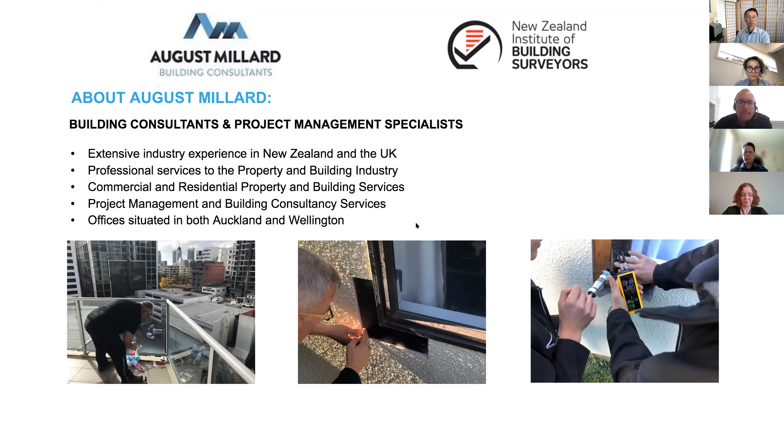And there's just a few clips here of some of the things that we get involved in. I think some of the audience will know what building surveyors do, and some of the audience probably are not sure what building surveyors do. I'll switch on to the next slide. Sorry, going back, in terms of sort of our background, and building surveying roles.

So one of my other roles in the industry is I'm currently the Vice President for the New Zealand Institute of Building Surveyors. So I thought I would touch briefly on some of the roles that building surveyors play. A lot of people in New Zealand would see building surveyors more dealing with weather tightness issues and leaky building investigations. However, if you look at the UK, building surveyors cover a much wider breadth of services, commercial building surveying, pretty much quite different to what we do in New Zealand.

In terms of the New Zealand Institute of Building Surveyors, we're a membership of roughly 230 members throughout the whole of New Zealand. Sorry, for some reason my screen's changed. We as an institute also offer training, and that training helps to develop our junior building surveyors and some of our members that come in from other areas of the industry like builders, etc., who want to retrain. So we have our 14 module system that allows you to then go through to become a registered building surveyor and obtain a diploma in building surveying.

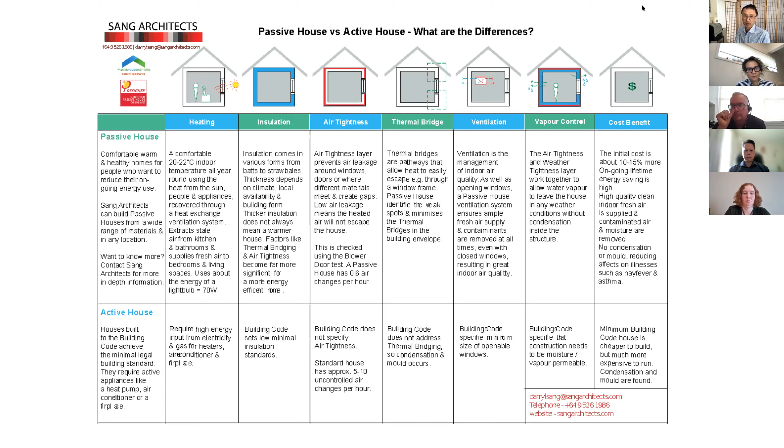It has continuous mechanical ventilation with heat recovery. So it brings in fresh air, gets rid of the stale air, but also hangs on to all the heat of the indoor environment. It gets rid of all that extra moisture, and avoids all that condensation and mold, and gets rid of all the CO2 and toxins inside. And it also controls vapor through the building envelope. It's airtight, but it's not vapor tight. It allows the wall structure to breathe.

Let's have a look. That slide seems to be changing itself.

But there we go. So anyway, that was the bit about the difference between passive house and an active house. An active house doesn't do those things. It tends to be cool and drafty, and it leaks a lot of heat and a lot of air, and you still can get condensation and mold on the inside.

So let's talk about the Wunderbar passive house. It's on a site in Orewa in the north of Auckland, in a new subdivision, 471 square meters, so a reasonable size but compact site. It has a slope on it from the high point at the rear down to the street. It faces north, and it's in a very high wind zone.

Residential single house zone, so only one residential unit on the site, and it's also subject to some planning regulations, particularly related to the Orewa area, and it's in the H5 residential mixed housing zone under the Orewa precinct. And it's also a new subdivision, so it's subject to the Sunny Heights subdivision design review panel. So there's a few planning restrictions around that.

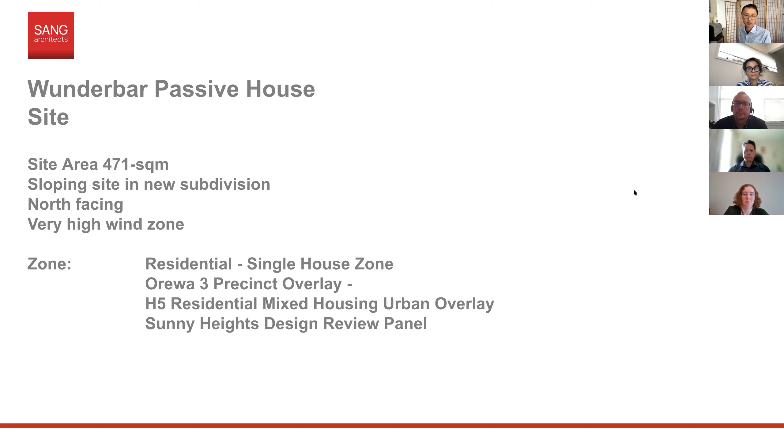So, as I said before, it's a new build house. Basically, it's a concrete house design, 255 square meters in floor area, plus 45 square meters of garage, 2-story, 4 bedrooms with 3 bathrooms. The main structure is Izodom. It is the Izodom insulated concrete formwork walls, 250 mil thick. That's 50 mil skins of polystyrene with 150 mil solid concrete reinforced core.

The Izodom system's actually passive house certified, so we know it's been analysed and certified to be up to the passive house standard. And that's the whole system. We're using the concrete ICF formwork walls. We have the Izodom insulated foundation system, that's the passive house certified floor slab, and we're also using the Izodom mid-floor slab system. So as a package, that is a fully passive house certified system. So we know it's going to perform, and we know that the thermal bridges have been thought about and reduced or eliminated.

The garage slab itself is outside the thermal envelope. There's a garage on the lower level that is outside the thermal envelope, but it's thermally separated from the main house. And we're rendering the whole of the outside of the house with a Sto plaster system. And the high performance windows are Gealan Festner S9000 UPVC triple glazed windows, again passive house certified. And we also have an external aluminium shutter system to provide extra shading for some of the windows that are going to be subject to quite a lot of sun. And the roof is just long run colour steel. And we're due to start on site very shortly.

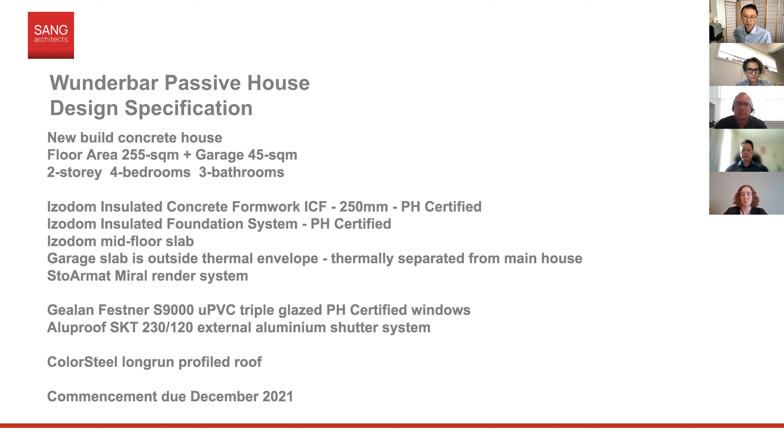So just a few images of the house on the site. So this is from the street, standing on the north boundary of the site and looking back up the site. So you can see we have a sloping site, so we're partially retained into the site. The garage on the ground floor, and there's a bedroom suite on the right of the ground floor, and then upstairs facing north are the living areas, living, dining and kitchen areas.

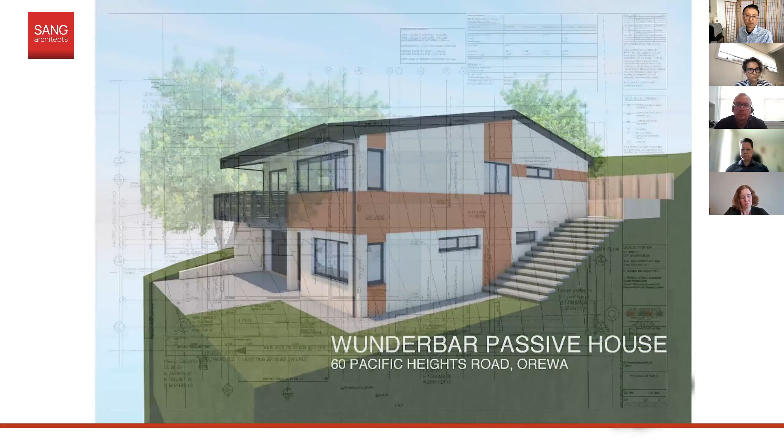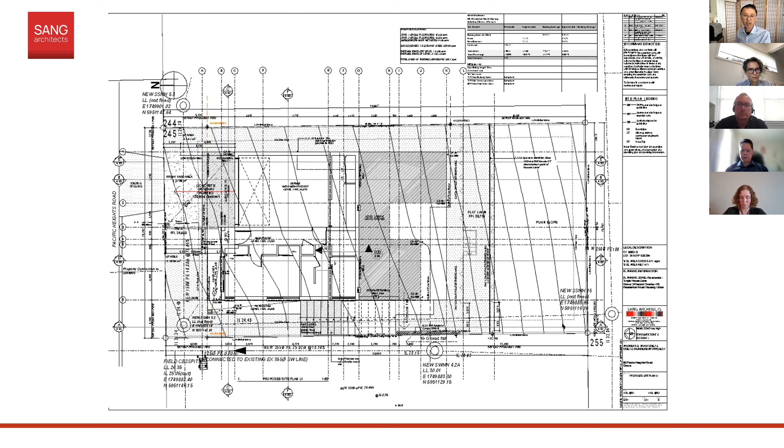And that's a site plan there. This is the street on this side here, and on the left-hand side of the plan, this is the garage and that bedroom downstairs, partly retained into the ground. This is the high back of the site, and there's some retaining at the back. And then upstairs we have all those main living areas and that deck looking out over the street, and then 3 bedrooms at the back.

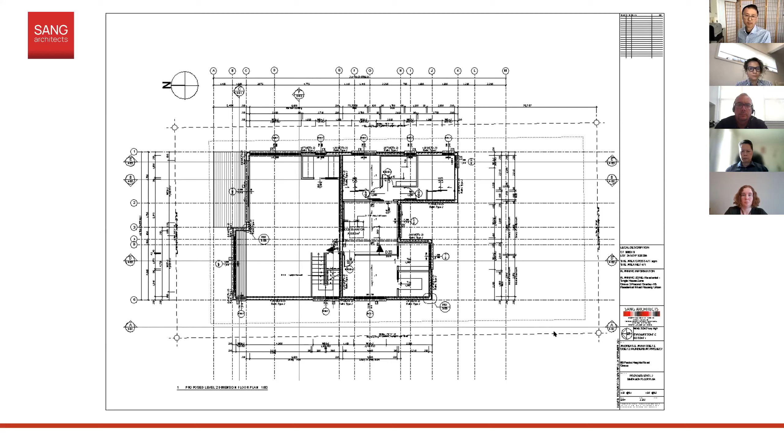Again, that just shows the ground floor in more detail with the garage and that bedroom downstairs, and then here the living areas and the 3 bedrooms at the back, and just the second living area here. So today we're focusing on the high performance windows. So we have some window details here, and Alia is going to step in and just discuss these.

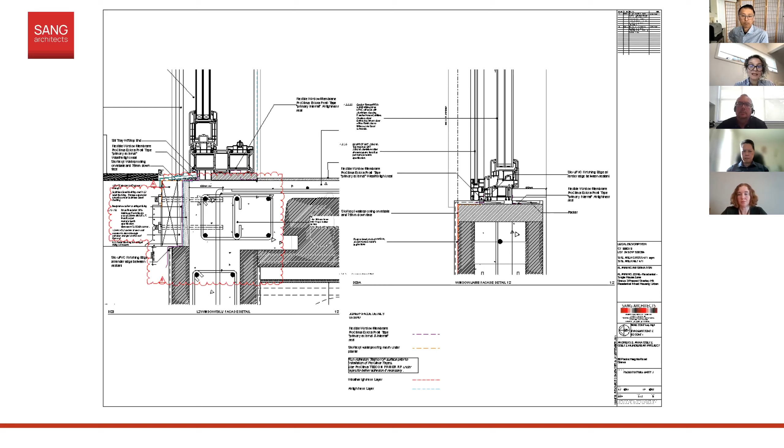So the Tescon profile tape was recommended for use in the project, both as an external weather tightness and internal air tightness flexible window membrane, and also as an air seal. And this has helped in eliminating the use of expanded foam and sealants as joinery air seal solution for this project. So now I'm going to hand over to Ian Fong to discuss the wind load compliance framework and also E2 weather tightness compliance path for the project in further details. Thanks, Ian.

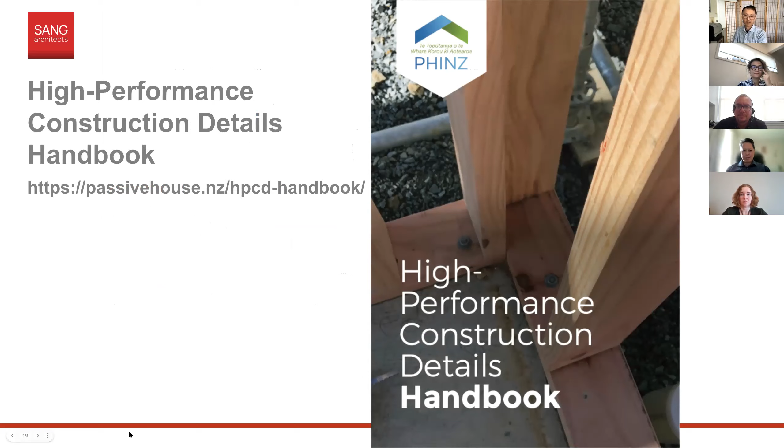All right, so I'll just carry on with this case study. Sang Architects have already talked about the site where the building is located, the profile of the building, how it's constructed, so I won't cover that. I'll focus more on the RFIs that we were asked to deal with. And then what I'll focus on mainly is the process of resolution, which compliance pathway is suitable, the alternative solution, what sort of evidence we had to provide. And then we'll talk about the acceptance of the joinery units in terms of compliance, and finally a peer review of the weather tightness details.

Now, I should also acknowledge and thank Andreas Goetz, the house owner. He's been supportive of passive houses, and we did ask whether we could talk about his house, and he was more than happy to allow us to share our experiences with it.

I also have a personal interest in passive houses. Daryl August, my boss, knows clearly that during summer I'm the one wearing a puffer jacket, so I like buildings to be warm as well. The warmer, the better for me.

Of note is that when I first got into looking at thermal performance, windows in particular, joinery accounts for about 8 to 10% of the thermal envelope. However, the heat losses from windows are up to 40%. So it's important that windows are done right for passive houses.

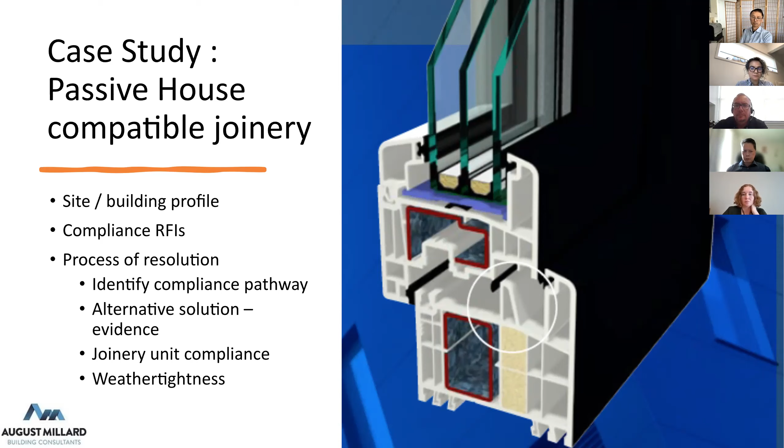So also from a building surveying point of view, we are interested in getting houses done right because we know that inside the building there's a lot of moisture as well, a lot of condensation, whether people are drying clothes or other activities within the house. And with a relative humidity above 70%, you're usually going to get mold. So it's not just about cold, but also the dampness within houses. So with that in mind, that's some of the things we looked at in terms of performance.

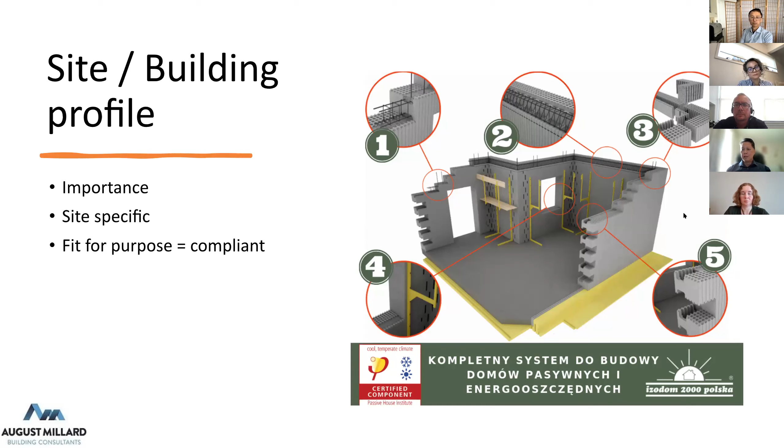But coming now to the RFIs, Gerald Sang also mentioned clearly in his slides that this particular building is in a very high wind zone, and that is particularly important in working out the compliance performance standards that it needs to meet. So if someone asks us, can you give us approval for window compliance or give us a review of it, the first thing we'll ask is, where are the windows installed? What type of building, and where is the building located? That's the first thing we try to work out, because we have to provide something that is fit for purpose, and I believe council officers are of the same mentality.

All right, so these are the RFIs that were briefly touched on by Alia and Gerald Sang. There were three elements. The joinery element itself: council were not familiar with this product. They needed to know, okay, you've got shutters that are going to provide some shade, and those shutters are attached to the joinery. The joinery we're not familiar with. It's an imported product as well. So you need to tell us that the joinery is suitable for use in New Zealand, and in particular in this location.

And then the RFIs related to them being unfamiliar with it also included questions like, okay, water gets in, how does the water get out? What are the drainage features? Where's the evidence to show that this product will allow water to drain out? And the last one is obviously to do with weather tightness, because they're not familiar with the product. They don't know how it fits into this particular building, which is insulated concrete formwork. So it's about going through, which I'll do now, firstly understanding where council are coming from, understanding what the issues were, and then we could work on it.

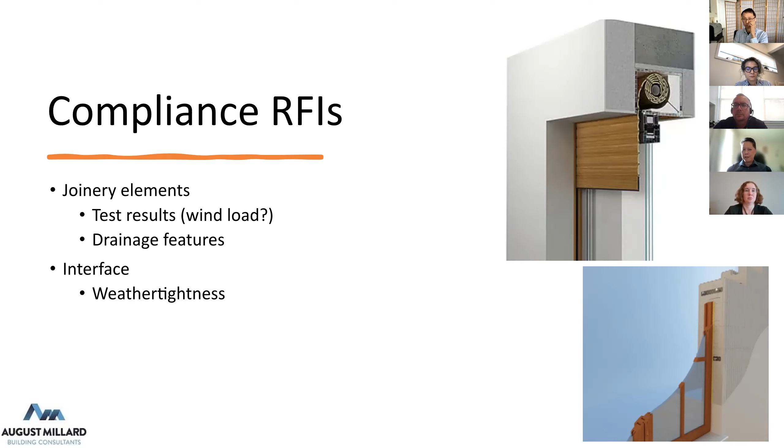All right. So with window joinery, in terms of New Zealand Building Code compliance, there's B1 structure, B2 durability, and E2 external moisture. We focused on E2 because we knew that's where council's concerns were, and partly B1 as well. So under E2, external moisture, in the New Zealand Building Code, there's a whole bunch of different compliance pathways.

The way we approach things is we want things to be simple and things to be done rather quickly for the client. So understanding the compliance pathways is, if it's a deemed to comply solution, which is the acceptable solutions, which is AS1, 2, 3, 4, or verification methods, we try and go with the ones that require us to do the least work, and that obviously is acceptable solutions. Preferably we avoid verification methods because that involves a lot of testing, and then that's another whole range of costs and technical data which we don't like to deal with. It can be quite expensive.

So in terms of what's best for the client, we have to go with what is already deemed to comply, what's already available, what council also find familiar and is also able to work with. So I looked into these things and had to filter and eliminate which of these acceptable solutions apply and which do not. Acceptable solution 1, that's for timber frame buildings, it doesn't apply here, so that's ruled out. Number 2 is for earth buildings, so same thing, that's taken out. And acceptable solution 4 is for light steel frame buildings, so it left us with acceptable solution 3.

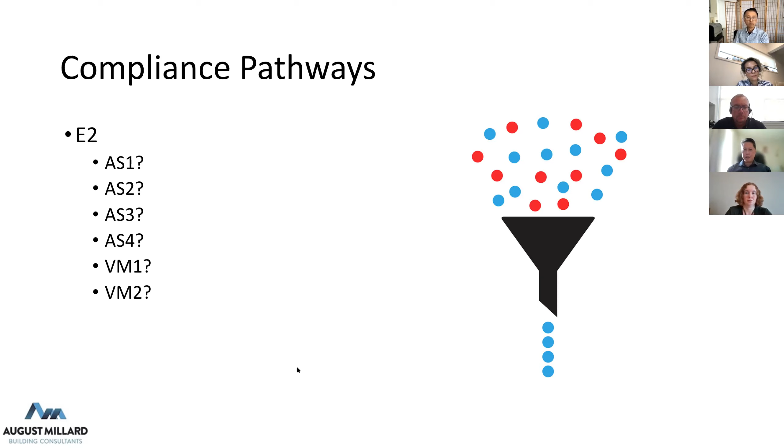So within that, I think Alia mentioned that there's a code of practice that's referenced in this acceptable solution. So we found a detail where the window joinery needs to match and fit, and that's the path we took to demonstrate to council, hey, we've got a scenario which is very similar to this, and with just a few changes, it's very similar to this deemed to comply solution. So ultimately it is an alternative solution, but it is based on acceptable solution 3, which council is familiar with. It's from the New Zealand Building Code.

The diagram I've put up there on the right is just an indication of the extent of tests that this particular window went through in preparing their test certificates. So when we received the documents from the clients, it was in German, but based on a little bit of interpretation in Google Translate, there was a whole bunch of tests, and this is what I've summarized there. It's water tightness, air permeability, wind resistance, mechanical strength, thermal insulation, sound, burglar resistance, and all these other ones. So that's a 30 to 40 page report.

Instead of putting all my time and effort into that, I had to work out what the New Zealand Building Code requires, what AS3 requires. Going back to that, it was basically the things that the New Zealand specific performance standard NZS 4211 requires. It's about wind load deflection, air infiltration, water penetration, and wind load ultimate strength. So those are the four things I had to look for in those test results.

But taking a step back, I'm not sure if anyone has dealt with it before, but sometimes test certificates and test results are provided by the manufacturer themselves. So there's no independence, no impartiality. So one of the things I had to establish firstly was, is the certificate that I'm looking at impartial? Is that reliable? Something I can rely on to know that it's not something the manufacturer has paid for and produced as part of the marketing information. So identifying that it is definitely independent, that the institution itself is also accredited, those were the first steps in establishing trust in the test results.

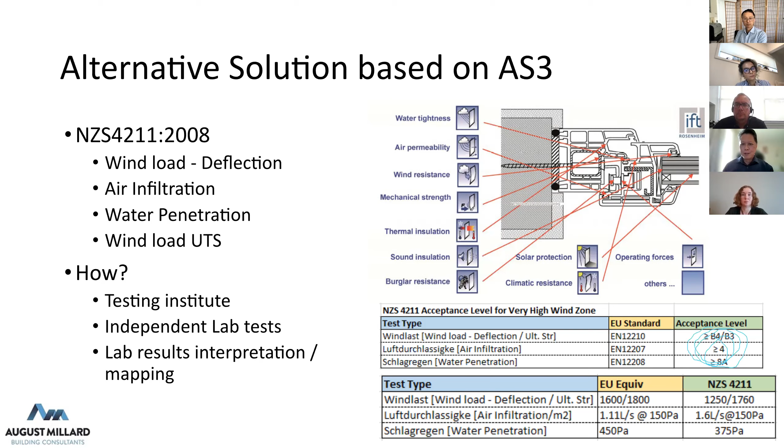All right, so I guess that is the one that I spent the most time on. The easy part is what I'll describe next. All right, so you had previously seen this slide before. One of the issues the council had is they said, look, okay, you've got a joinery unit here, but I don't know what happens when the water gets into it. What happens to the water? Does it get trapped? Does it drain out? We don't know this. We don't have evidence of this.

Can you please show to us or provide the evidence that there are drainage holes or slots for water to drain out? So I guess council found it difficult because the information they were given, they had a lot of marketing information and some brief installation manuals, but it didn't give them the information to meet the reasonable standard that they're after. So I had to dig back and use a bit of German and find out from the manufacturers,

when they actually fabricate these windows, what's the instructions they're given, and it needs to show where the water drains out. So I had to get the diagrams. I believe the best way to show council was with the visual representation. So I got these diagrams from the installation manuals or from the technical fabrication manuals. Then I said, look, this is the translation of it. This is basically showing how the water drains out, and council asked no further questions on that.

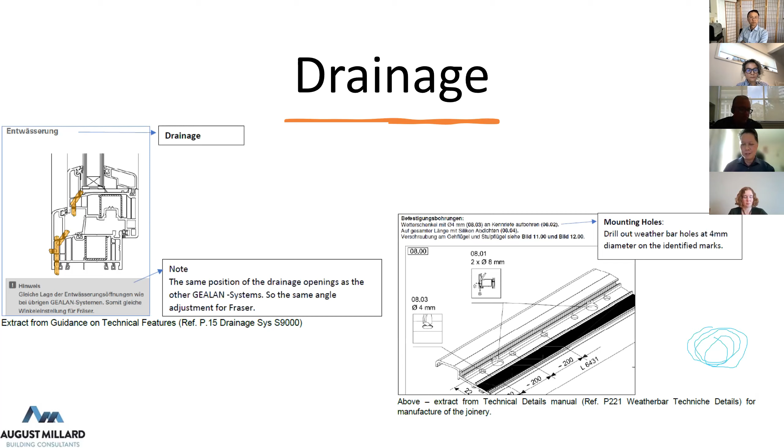So something visual, something very clear, showing the cross-section, showing where the holes are drilled. That's very clear about how the water is going to get out of the units installed. So that was quite easy to resolve. All right, the next one, I'll make some reference to some of the drawings that Sang Architects had provided, because council will get those drawings and not what I'm showing you on the screen now.

So when council receives the plans for consent, they show the units as they are assembled, as they are connected together. So when you looked at those diagrams, I guess council was looking at it the same way that I was. And I said, okay, why is council finding it hard? And the reason is they don't know where the roller shutter ends, and where's the interface to where the head of the joinery unit is.

And then when they interlock together, that alone will prevent water getting in. It's designed to be a weather-tight seal, and it's meant to be very easy to install. So it eliminates a lot of the work for builders in terms of having to prepare a substrate and then getting it installed and using all kinds of sealants. So that was a way to show council, look, it's inbuilt into the design, the fabrication of the product. So that addresses partly that as well.

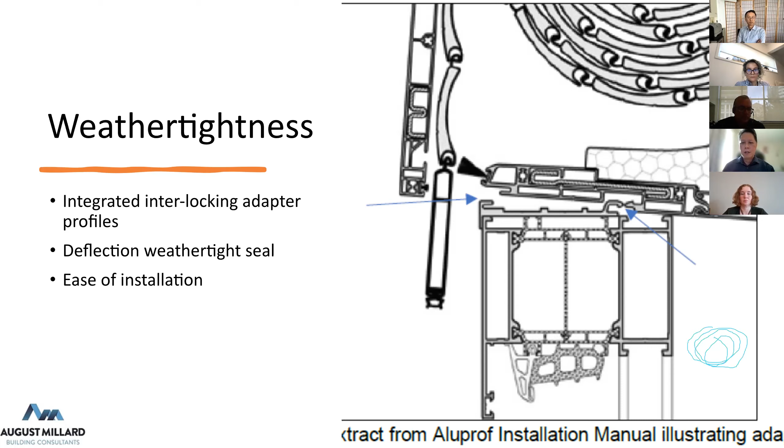And now finally, I'll just talk about a final review of the weather-tight details. I recall that we had talked about acceptable solution 3, and in the code of practice, it specified some of the key elements that needed to be met. So in that regard, when Alia had done her work with Sto and with ProClima, we went back to look at it just to make sure that it lines up with acceptable solution 3, the similar elements that are in place. So it was basically just a quick review from that point on.

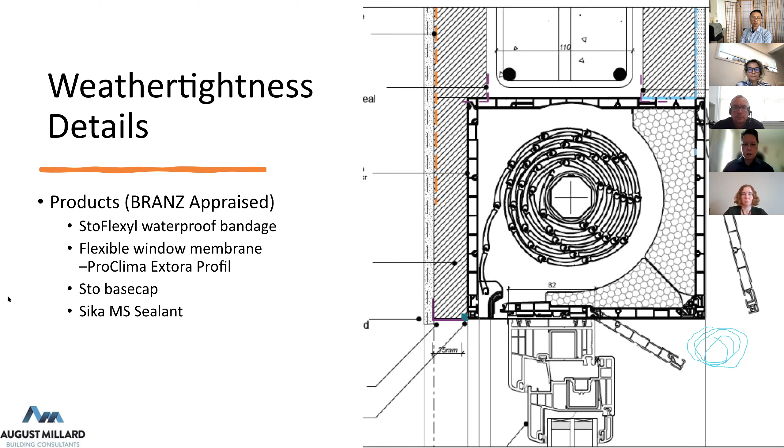And I think Alia's already talked about this, the waterproof bandage, the profile tape, the base cap and the sealants, which is what we were looking for, which matches what AS3 was looking at as well. And just very quickly, that's the head and this is the sill. Nothing too different about this. The only thing we had previously specified in a previous project was the sill tray with the stop ends, so that was also in place in the details, and the rest of it Alia had also clarified as well.

And just a few points on this. These products are BRANZ appraised, so it makes it easy for council to accept, because they know BRANZ is an authority that certifies and confirms that it's suitable. The other thing was that because it's an alternative solution, we had to support that with, I think Daryl had talked about it earlier, the Wellington project, that the details used here are similar to that.

But not only that, I contacted the council in Wellington and asked them to provide something in writing. Look, that's been installed and it's been in service. Is it performing? And they provided something in writing, basically saying, look, this is a fantastic product. It exceeds the expectations. It's definitely performing, because that's the building they go back to every now and then as education for other designers and other consenting authorities. They use that as an example to show others that there can be better windows, better joinery systems in place. So on that basis, we are confident to say that what was specified is performing. So that was further evidence to the technical details provided already.

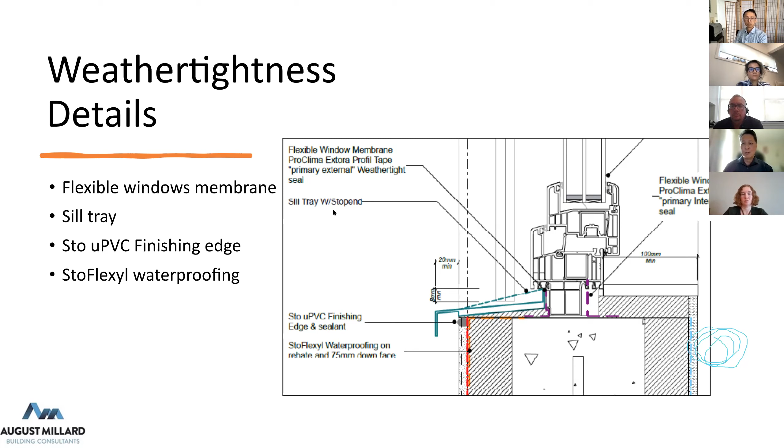And as Alia said, further to that, ProClima also released recent test results as well. So there's full confidence that what is provided is a tested system and it works. So that's how we were able to convince council, look, we've looked at these products in the past, we've looked at the present, we supported it with evidence as far as we can find, and this is the approach we've taken. So there's no reason why these windows cannot be installed in this particular building. So that's the approach we took to resolve the issues, and that's the end of my presentation.

So just a quick run through again: understanding what the RFIs are, where council is coming from, looking at it from their point of view, what are they struggling with, and therefore how can it be made easier for them to understand and process, and therefore put the sign off on, and choosing a pathway that helps them realize, look, this is not too far off from something that already exists, and then giving them all that evidence to say, they've given us the evidence we need, we can now sign off on it. So basically that's the process we took, and hopefully it's of assistance.

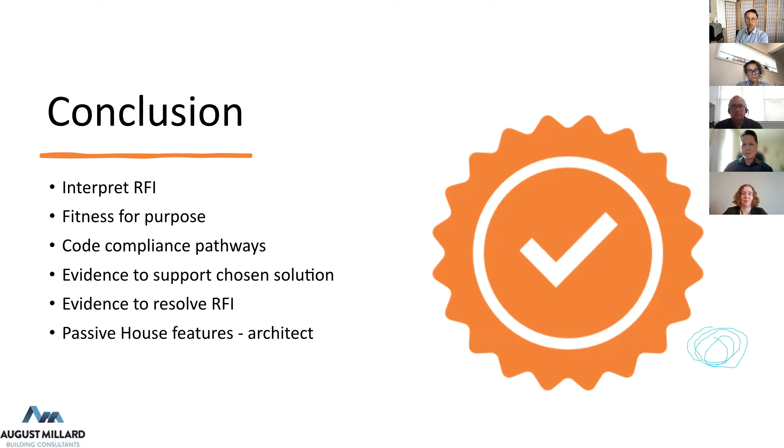That's all from me. Thank you. Thanks so much, Ian, Daryl, and Alia.

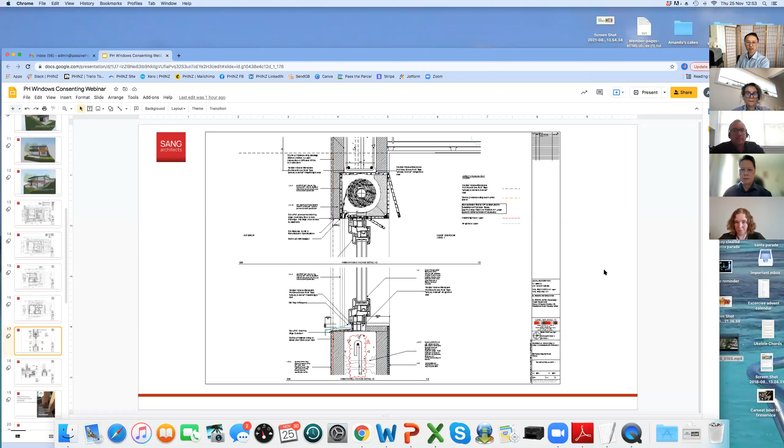The shutter box on top of the window is fully insulated. As we zoom up, you can see at the back of the slide. I don't know if you can see my cursor, but yes, it's a Passive House suitable shutter, and it has actually got full insulation at the back here. Right. And if I could add, oh, sorry, Amy. Please, go ahead.

I was just going to add that the reason why we removed the insulation from the underside of the lintel is because we needed to have that direct fixing of the shutter box to the lintel structure. And as Daryl had explained, the shutter box itself has insulation on the inside because it's a Passive House certified product. And we have also allowed for flexible window membrane, Proclima Extora Profil tape as a weather tightness and air tightness improvement measure at that junction between the shutter box and the lintel itself, also to improve the performance of that detail.

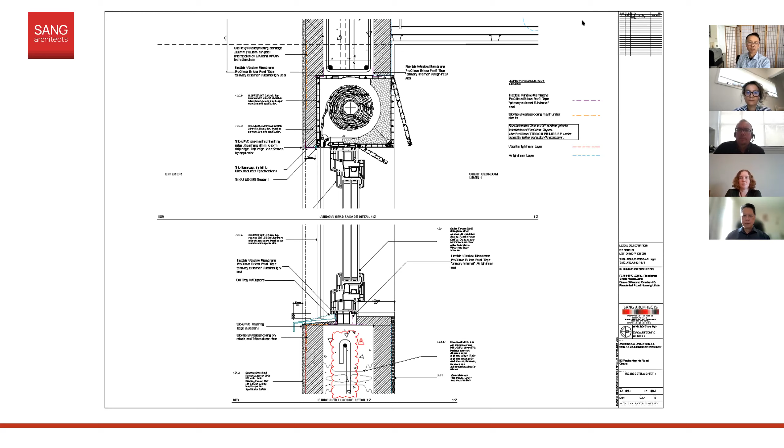Thank you. And another one where we might need to look at the slide. The head detail looks like a TB with the aluminium blind box in direct contact with the ICF concrete core. I think it's a similar question. Right. Okay. Haven't got any other questions that have come up at the moment. Is there anything anyone else would add? Add to in general? No. Okay.

I'll just comment briefly on what Daryl, August and Ian had mentioned in terms of the process of certification. I would say that crucial to the success of this was the collaboration between suppliers and consultants, and approaching council with this joint effort made a huge difference for them to understand. Rather than approaching suppliers and consultants individually, getting everyone on board and discussing the details helped a great deal to achieve that balance between responding to E2 weather tightness and at the same time maintaining the integrity of Passive House design.